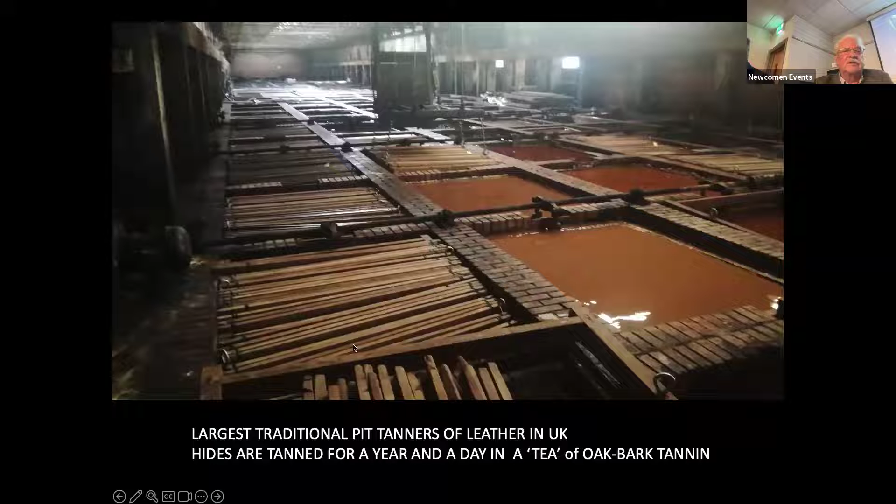This is a very well-established business, a very entrepreneurial managing director. It's the largest traditional pit tanners of leather in the UK, and it's still active within, I suppose, 1 mile of the commercial city centre, in an area that you'll see later is ripe for development. The hides are, as traditionally, always tanned for at least a year and a day, and they still use the oak bark tannin, as you can see there.

Quite wonderful. It ought to be a tourist attraction, but it's great. There's great difficulty in getting in for obvious reasons. My concern is that this one day will become firstly known about, and secondly, a lot of pressure to redevelop it. You might imagine that at the ingoing end of this system is raw cow and other animal hides, which is not exactly compatible with fine housing being built right next door now. So there are increasing pressures on this site. Nevertheless, it's survived so far.

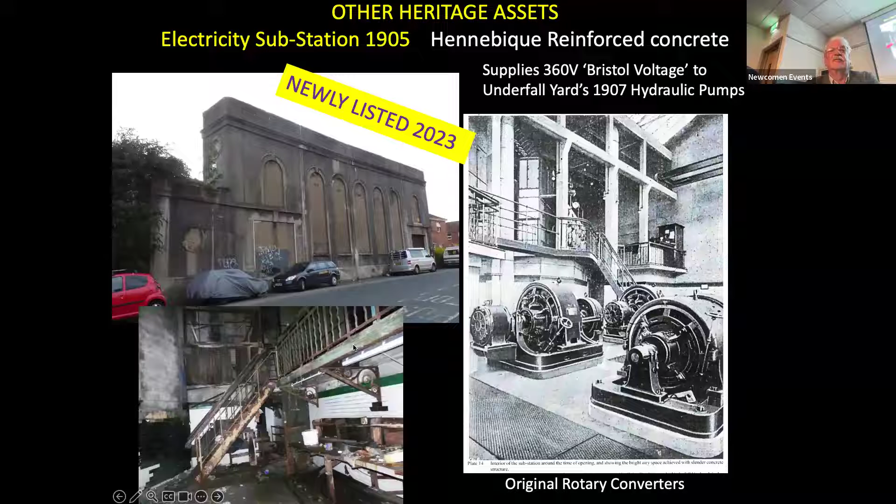We also have a rather fine electrical substation from 1905, constructed to Hennebique's design, reinforced concrete, one of the earliest - I think it is the earliest in Bristol, one of the earliest in the country. It was built to supply 360 volts, which is Bristol voltage, for the electrical systems in Underfall Yard that powered the hydraulic system. It still does that today, but from a transformer. It used to have rotary converters in it, as you can see there in that photograph.

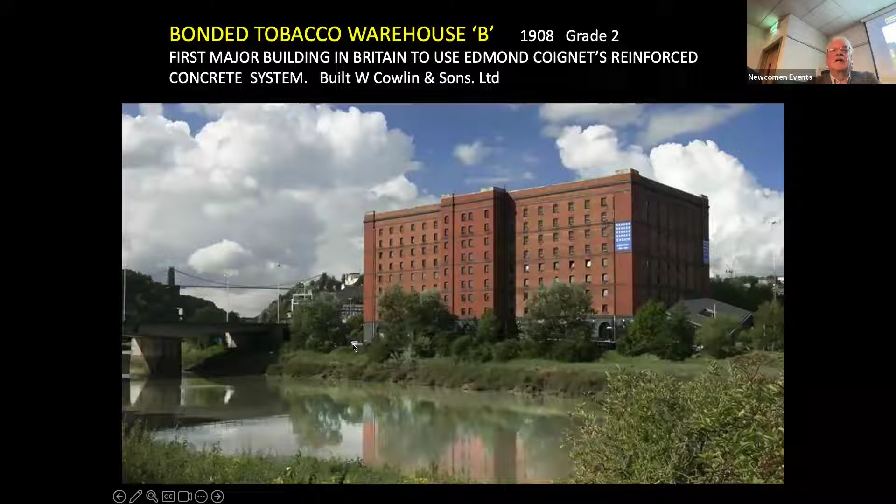We have probably more than our fair share of bonded tobacco warehouses. Of course, Bristol was famous for its Will's tobacco factory. This is Warehouse A, 1902, built by Cowlins. This is Warehouse B, 1908. These are all Edmond Coignet's reinforced concrete system, all grade 2 listed, and this one is tobacco bonded warehouse C, which is a storage area now.

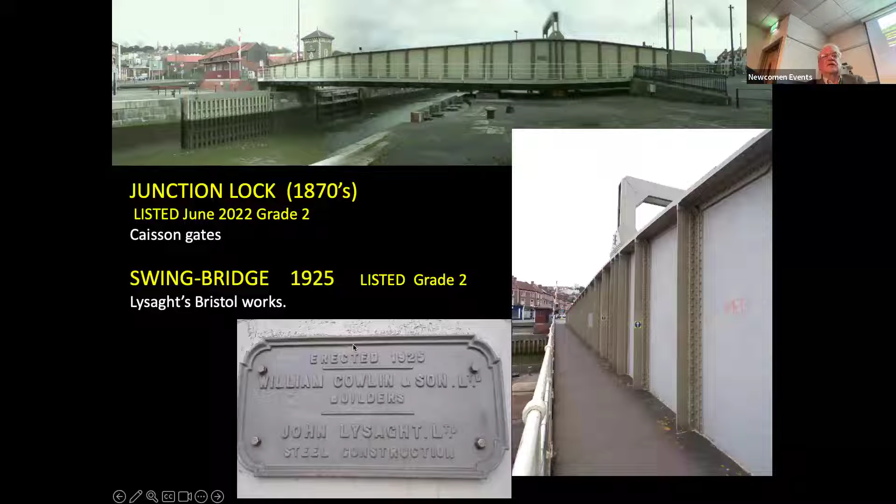The junction lock is actually now listed. It wasn't for some time. And the swivel bridge over it is locally made, 1925, made by Lysaght's Bristol Steelworks, and still rotating. It's a fine bridge.

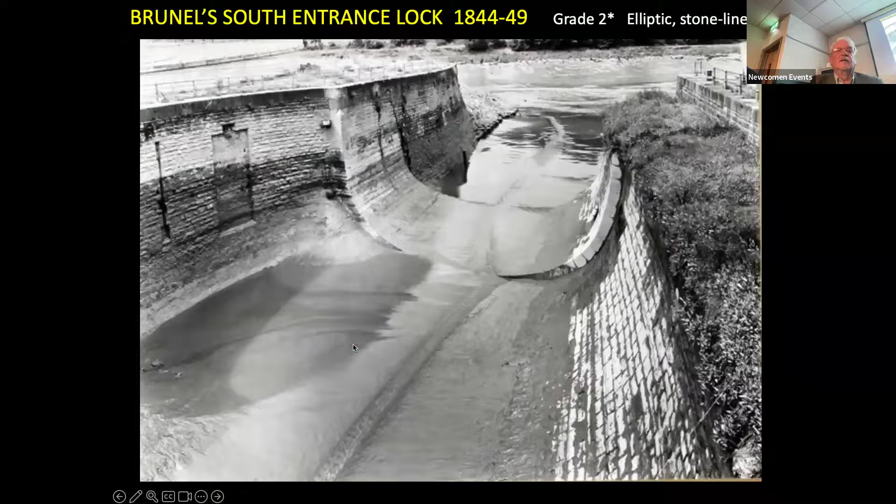Brunel's south entrance lock, that was the one I showed you in that first photograph on the right. That's what it looks like from upstream, or rather it did look like that until about 12 years ago. It was designed to have caisson gates, and you can see on the left there's a big recess in the wall where the huge hinged caisson gates used to go back into the wall so that ships going through the lock would not catch it.

I'm pointing to a little hinge on the wall there. That little hinge is 9 inches in diameter. It's a peg hinge, and there's another one further down. Wonderful, just a great big door, really, partially submerged. It's a floating caisson and closed against this rebate here.

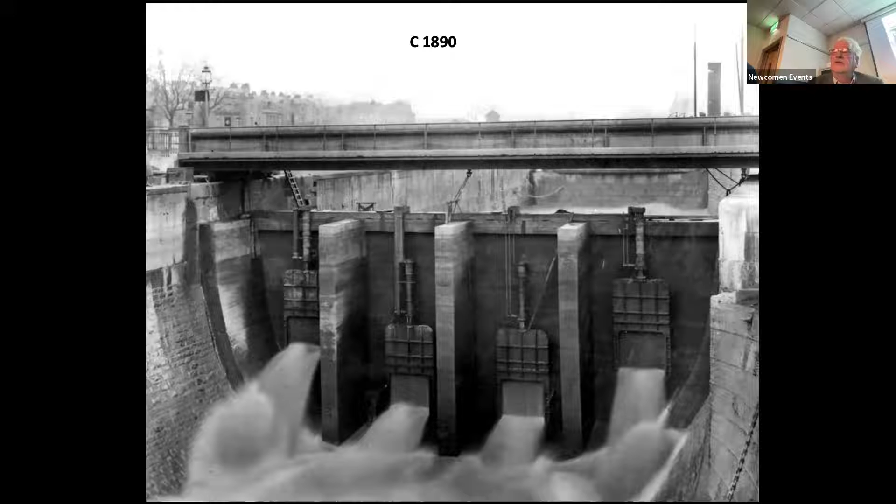Now, when they closed it off, you remember that first photograph I showed you? It showed a barrier midway along the lock, and this is the barrier as it was built. You can see that it has 4 hydraulically operated sluice gates. This is water hydraulic operated, pipes coming down from Underfall Yard. The hydraulic system actually is still working at Underfall Yard, although not delivering power to anywhere.

And of course, you needed so much water flushing through the floating harbour, because if you recall, this is the impounded River Avon, and the silt is still coming down that route. It's got to either settle out in the docks and cause no end of trouble, which it did, or it's got to be allowed to go on through and downstream, down the River Avon to the estuary. And so this was what was designed, to allow a jolly good flow from the Cumberland Basin through the closed off Brunel Lock and on then down the River Avon to the River Severn.

The hydraulic system in Bristol closed in the mid last century, about 1955 or 60, I think. And so these hydraulic rams would never be working, and they were modernized, or rather one of them was modernized. The one on the left that you see there was turned into an electro-hydraulic system to allow the water still to flood through, to just keep the water in the Cumberland Basin sweet and clear of silt.

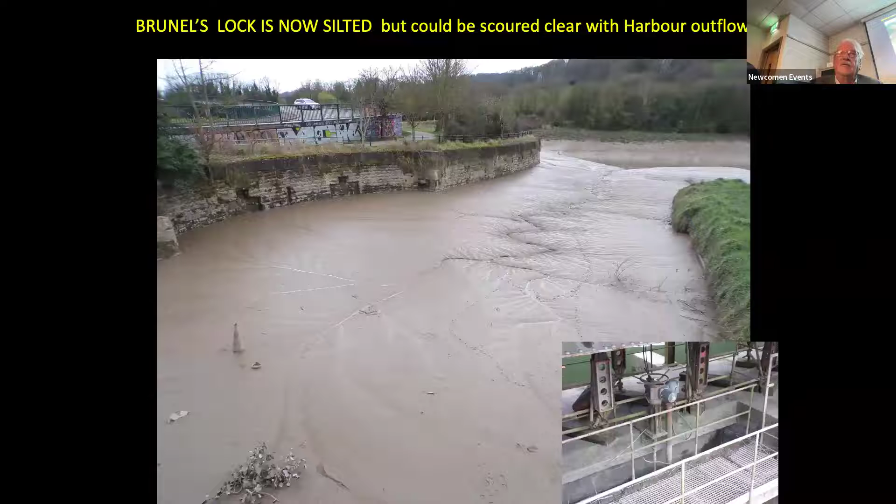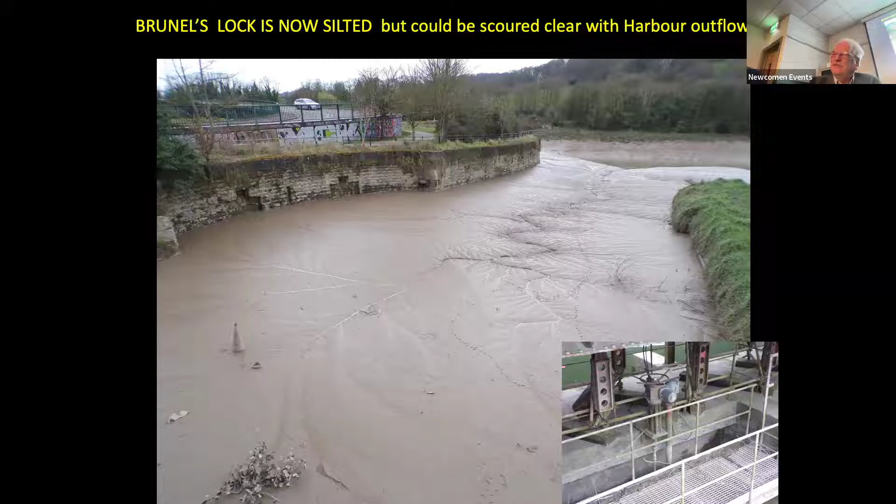Unfortunately, about 10 years ago, the electrics failed. It was going to cost £20,000 to put it right, which a city of our size couldn't afford. And so there we are, that's what it looks like now. There's about 25 feet of silt in it. You look at the bottom right there, you'll see the mechanism. It was a relatively straightforward electro-hydraulic ram for lifting the sluice gate. A great shame, because now we can't see that fantastic masonry work. Nevertheless, I'm hopeful that we might be able to find enough money to get that sluice gate working again, and the dividend would be fantastic to be able to see this rather wonderful masonry work going back to the 1840s.

Over that lock is a replica bridge. That's from 1873, from Howard's time, a copy of Brunel's bridge, which we'll talk about in a minute. That was a swivel bridge, but it's now stationary and unfortunately has been truncated at its tail end.

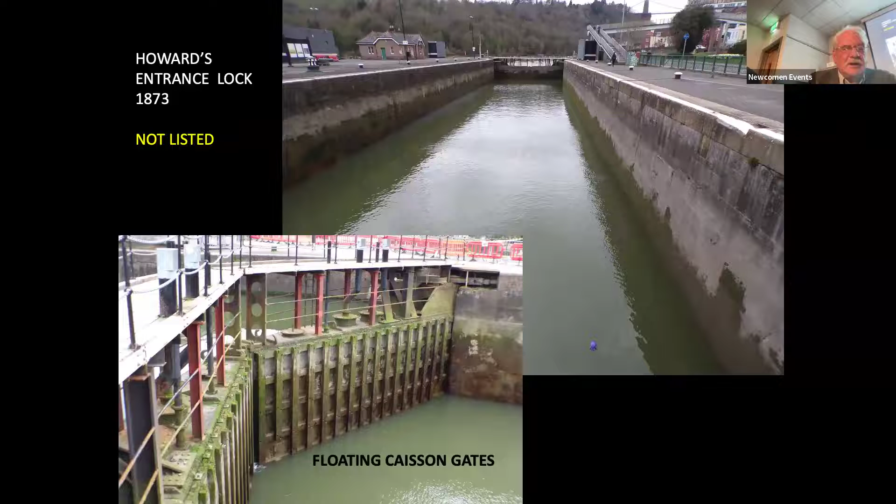That is Howard's Lock from 1873, still very much in use, in good condition and unlisted. For reasons that I've not been able to establish, the operational equipment in Bristol City Docks is not listed. And I think that's because the council don't want to be in a position of having to give themselves listed building consent to carry out work to their own property. But that might be a slightly cynical attitude. Nevertheless, again, floating caisson gates, as you can see bottom left there, still very much in use and very fine.

We also have the dock office at the entrance, and to the right, listing slightly, the toll booth, and the little green lean-to has in it the remnants of a tide gauge. It's all still there, and the whole lot is unlisted. And even though there was a review of the listing last year, none of it was declared to be of sufficient interest, architecturally or historically. Of course, there are other structures of the 1870s that look like that, apparently. A shame of that, I think. They are unique to Bristol. They might not be unique to the country, but we have only one set.

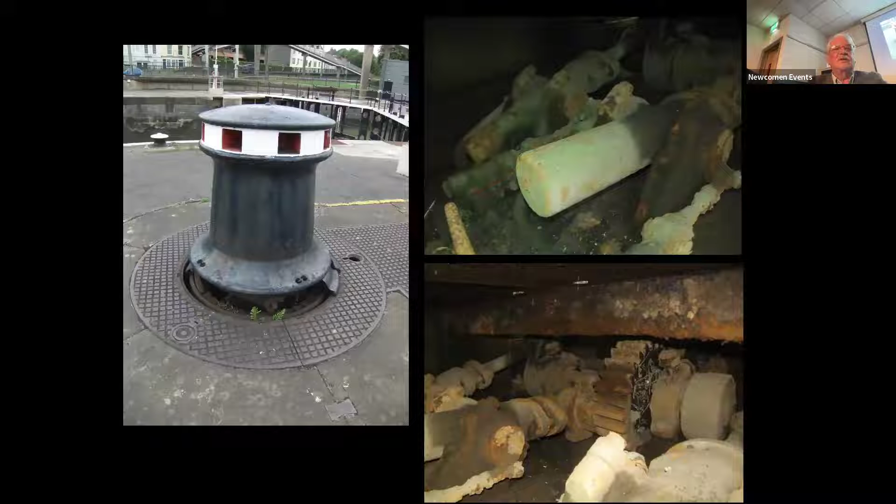We've got all sorts of rather wonderful dock furniture. We have electric capstans, we have hydraulic capstans. Of course, no hydraulic system now. But if you look underneath that hydraulic capstan that you see on the left there, you will see on the right a 3-throw water hydraulic motor. Wonderful, we have several sets. We also have Stothert & Pitt electric capstans.

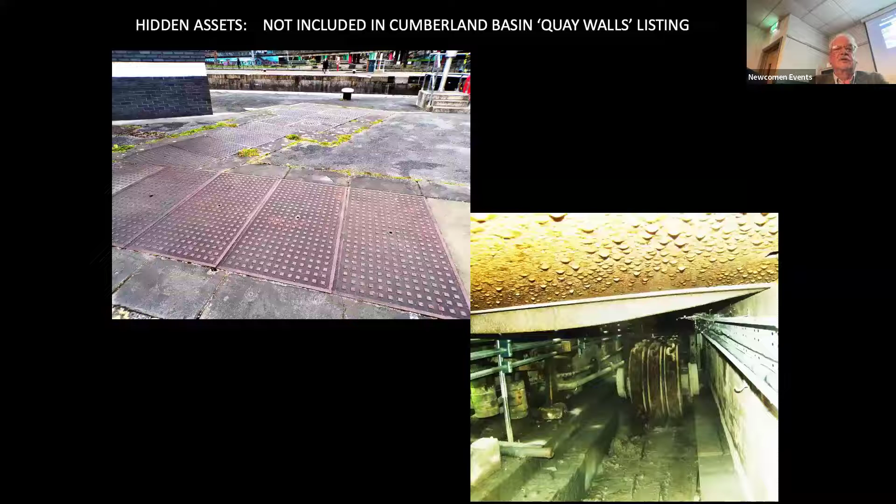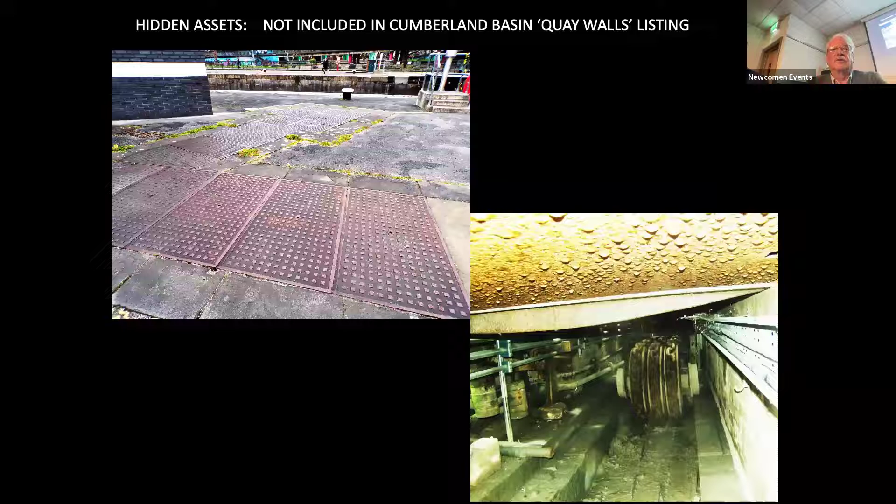There's a lot of these iron covers all over the tongue, the entrance area, and underneath are pits containing wonderful hydraulic equipment. These are hydraulic jiggers, rams with multiple falls of chains to increase the length of chain pulled. They were used both for lifting the paddles to allow water through and to open and close the lock gates. Every lock gate had one to pull it open and one to pull it closed, and there were two gates per end of the lock, so quite a lot of these survive. We don't know exactly how many, because the harbour master is rather coy about letting us lift his covers to see what's underneath. We have ways of peering through small holes to find out.

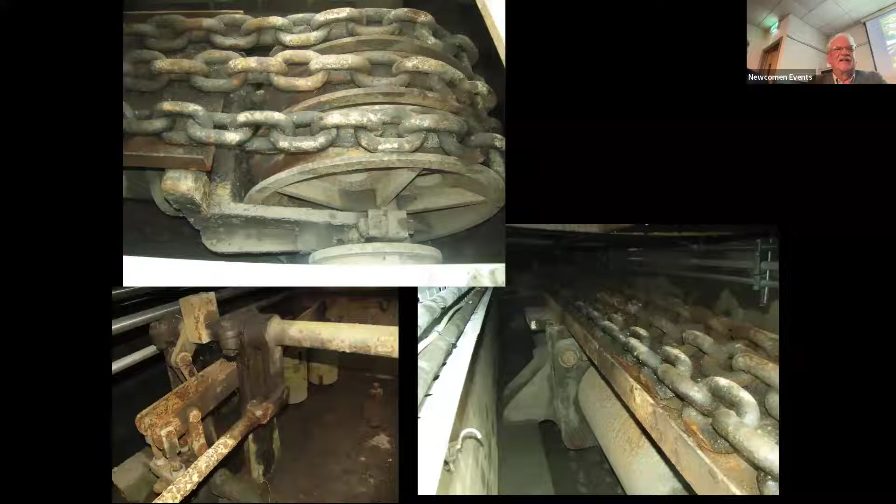Some of it's in remarkably good condition, given these are pits underground subject to seawater flooding. The whole of this area floods up to quay level. It's quite serious, and it's getting worse, of course. More of that later if you're interested.

In fact it was nearly cut up, but the harbour master at the time thought he'd better do some research first, to find out at least what the material was made of - well, it might have been by Brunel. After quite a lot of research, it turned out there were three bridges like this in Bristol, which made it very confusing trying to find the exact history of this one. It was verified and authenticated by David Greenfield, the structural engineer, as being Brunel's bridge - and a very fine one it is.

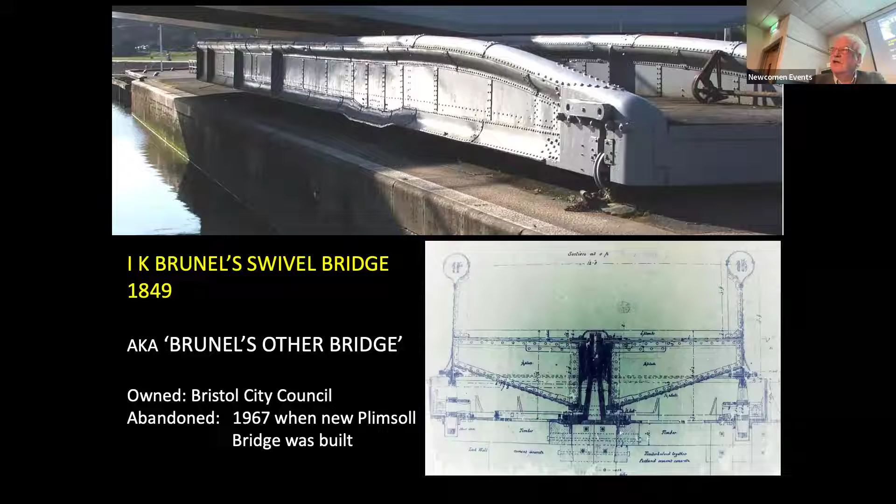So it's in rather poor condition now after 50 years. What we're looking at there is the central box section - there's a series of boxes, an octagonal box and a cross, if you like, in the center, and that's carrying 75 tons. Underneath it is a series of wheels, just four wheels and a turntable ring, and you can see it's really in rather poor condition. There's a danger it could eventually collapse.

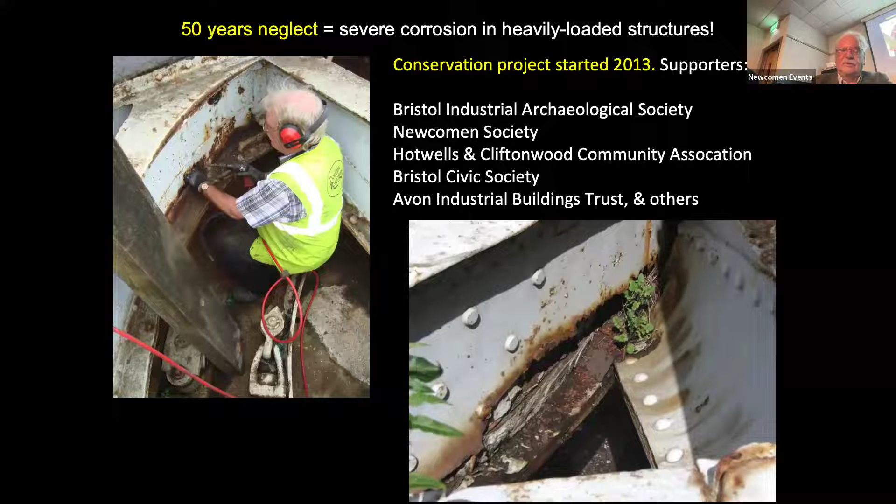So we've taken steps to try and preserve it. We started off by doing a lot of archival research, and we've done investigations on site - as you can see, we've peered into every corner. We've drilled holes to find out what the foundations are like, and discovered this was actually built on top of Jessop's old lock.

If you remember, this was moved to this site around 1872, when the new lock, Howard's Lock, was being built. Well, if you were excavating a lock, what would you do with the silt, the spoil? You'd simply tip it into any other lock nearby, and that's what happened. So this whole 75-ton construction sits on sort of compressed alluvium, which is surprisingly stable.

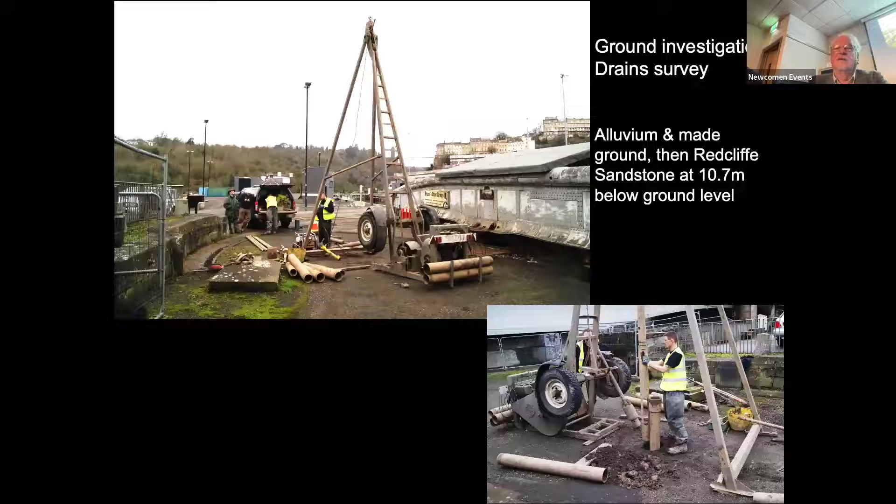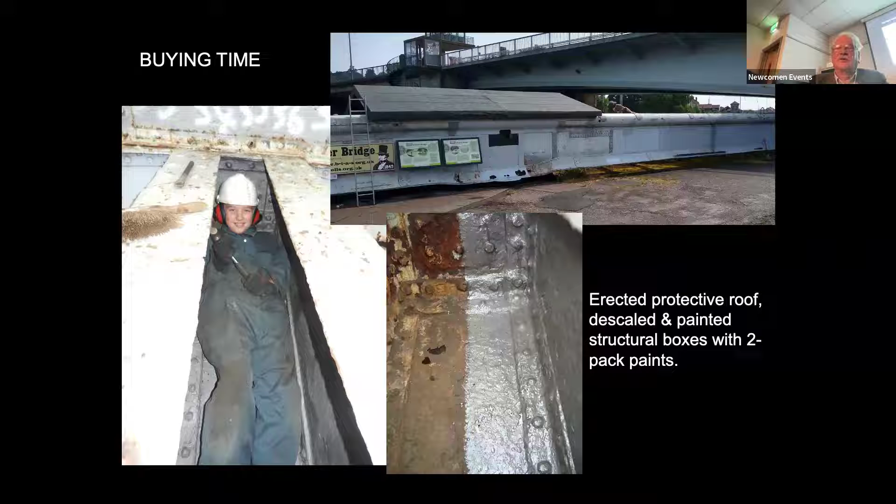Fortunately, we have a small volunteer who could get into the 9-inch wide box spaces. Need a small volunteer - unfortunately he's grown up now. In fact, there he is. He's now at Plymouth University. He's been with us for 10 years.

But we have now got the bridge turning again. We've done a lot of work to the turntable, including replacing some of the bearings, which you see top right. Notice these bearings - they're bronze shells, but to Brunel's rather extraordinary design, they're double conical, and we have no idea why. It's a real pain - everyone else would make them cylindrical, but this increases the complexity vastly. But nevertheless, it works.

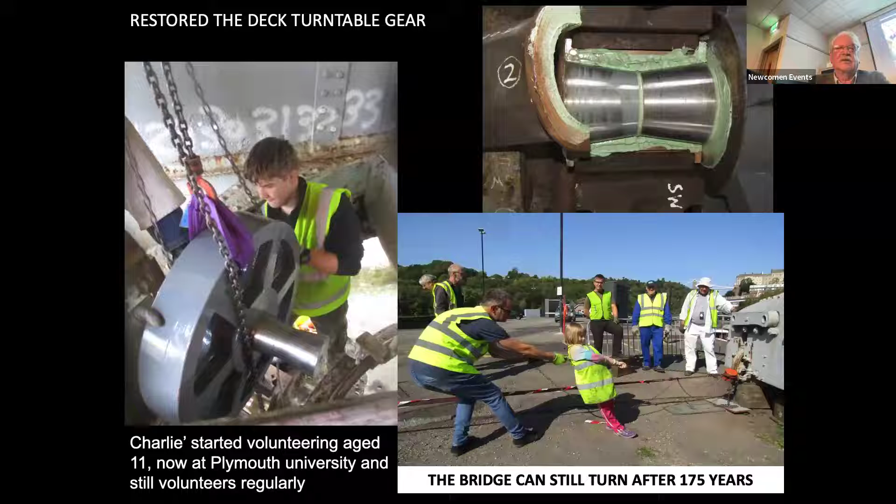We've been trying to raise the profile of this whole project. We've got 400 supporters now on our database. We have monthly work days for volunteers, and numbers seem to maintain very well. And by the way, next Saturday there's a volunteers work day, so do please bring your overalls along.

We had a 170th anniversary celebration in 2019, which was very well attended by the public, and we had, I think, 6 interviews from the local media and so forth. We had a 2-day celebration, the second day being a conference organised by the Institution of Structural Engineers.

And of course, we are open for doors open days. We've published some of our research and other information in 3 papers in the Newcomen Society journal. It's all been recorded by video, and of course social media is a great part of our life as well.

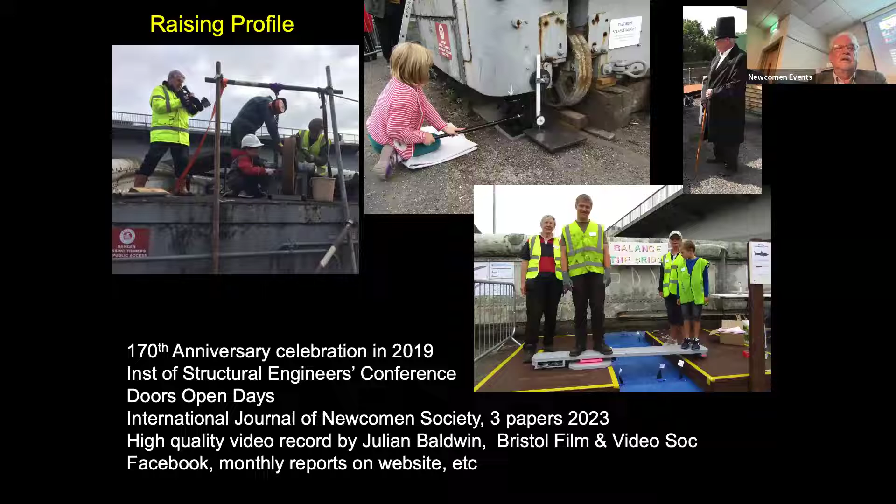So much about the heritage assets then. Let's just move on to the sort of politics and what's going to happen, what has been happening recently, and what is likely to happen in the future.

Now we're looking at a plan of the conservation, or rather the character areas, in Bristol City docks. All of that area you see there, except the red one to the left on the west, has been developed or is being developed. There are well-developed plans, and much of it has already been delivered. So all that's left is that difficult bit on the left-hand end there, where there's a lot of roads and rivers, or waterways rather, which is difficult from everybody's point of view, certainly from the planning point of view.

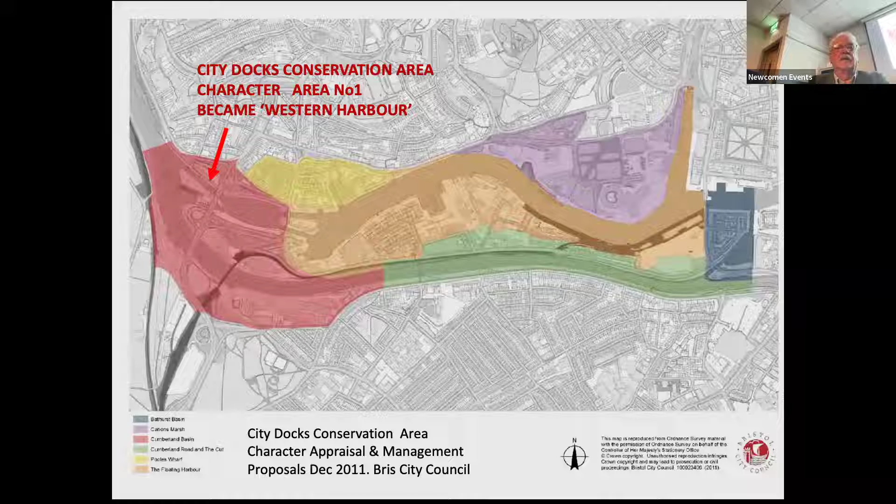And it was that area, the red one, that has now been called the Western Harbour. In May 2016, our newly elected mayor, Marvin Rees, declared his intention to create a city of hope built on ambition, inclusion, and social justice. Excellent ideas, and he focused very much on that western end of the harbour.

Actually, he was the first mayor of a European city who was black. He's been a very capable person, in my view, of high level of integrity, and has tried very hard to deliver what he said there.

In 2019, he proposed a scheme for that Western Harbour area that would include 2,500 new homes with offices, student accommodation, retail, and leisure. Now, you might recall that it's already full of waterways and roads, so that was quite an ambition.

He apparently sought funding from the Far East and had some success in that. It went public, and there was frankly quite a lot of outcry from the public in Bristol, certainly local people - why were we not consulted, and what's happening here, and what about the flooding, and what about our road schemes and all the rest of it?

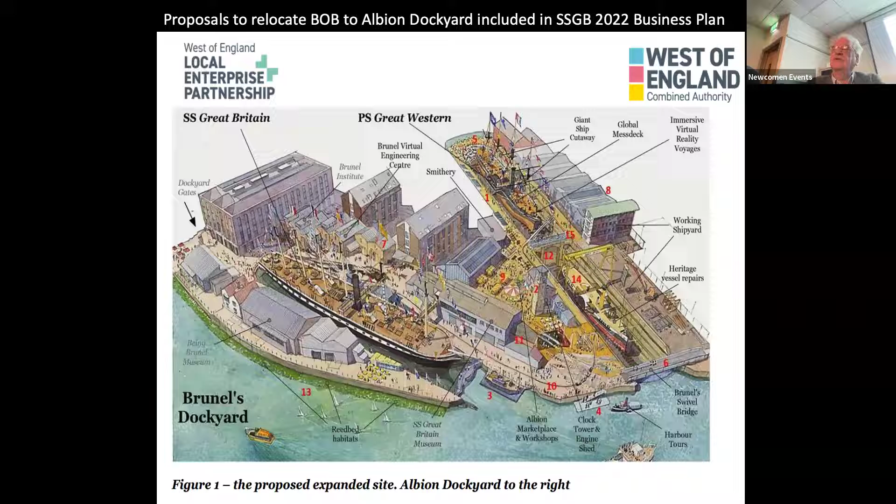So the plan was to move this rather derelict, heavy and flexible bridge to Albion Dockyard and display it there. That had some advantages - it would happen fairly quickly, and the SS Great Britain are rather good at capturing money and making things happen, so they would look after it and do a good job of conservation and maintenance. The downside is that it would be extremely expensive, out of context, and quite a risky thing to do.

So I'm just going to run through what happened last year. In the spring, Historic England relisted everything, all the historic items in the Western Harbour development. That's partly because they could see a development coming, and partly because they could see this bridge might be moving elsewhere. So they gave the Brunel Lock, the Swivel Bridge, and the Plimsoll bridge over it what they call group listing - in other words, it has group significance, meaning please don't take one item out and put it in the Albion Dockyard.

In the summer of last year, that plan I showed you went public, and they declared their intention to put it in for listed building consent. In response, one of our volunteers started a petition on Bristol City's own website to ask the City Council not to allow it to be moved, but to preserve it in situ. That became very popular and in fact became the largest live petition last year.

Then suddenly, on the 1st of September, the CEO of the Great Britain Trust announced his retirement with almost immediate effect. Historic England wrote a letter to the SS Great Britain giving a lot of clearly worded reasons for not moving the bridge, and that resulted in November with the Great Britain announcing they weren't going to move the bridge. Subsequently, they put in their planning application for Albion Dockyard without it. This may not be connected, but I heard then that there's a new chair being appointed at the SS Great Britain at the end of this year.

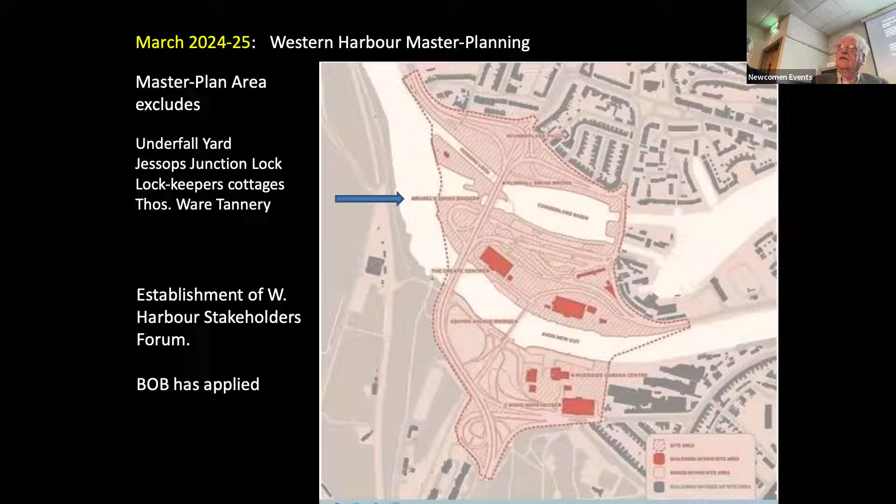So what's happening now? Well, the whole of that area is subject to master planning, as they call it. And the liaison, the consultation with the stakeholders, the people like our group, and the residents, is going to be via a stakeholders forum. That is being set up right now, and we're hopeful of being invited to join it. We have applied.

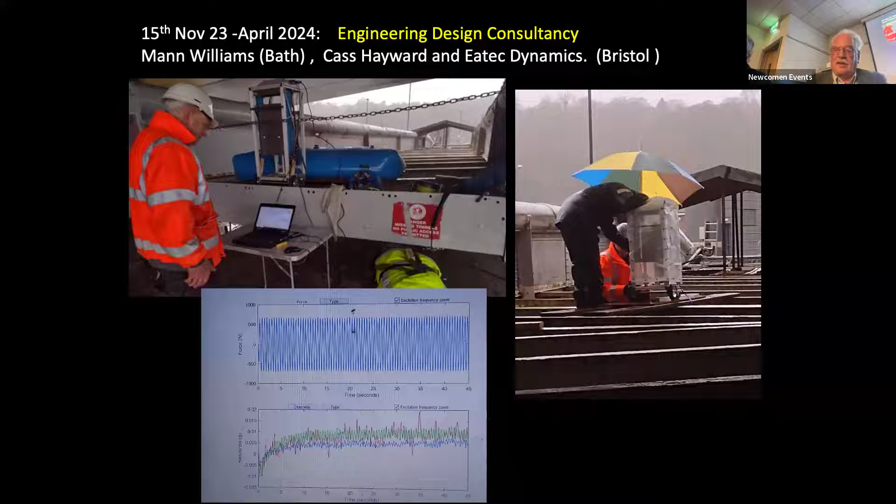We have also now just started an engineering consultancy paid for by Historic England. This is a rather innovative scheme using modern technology. They're using a technique where they shake the whole bridge, and a lot of transducers measure the acceleration of different points, so they can work out the flexibility of the bridge and what needs to be done to repair patches. But I'll show you a video of that just now.

So just very briefly to finish off with, what we're doing now is trying to get agreement on what the policy is for the treatment of all the heritage assets in the Western Harbour area, not just the bridge. It's to be supportive of the Western Harbour master planning process. We're not trying to fight them in any way. We are on their side, provided they do the right things in terms of conservation.

That might sound a little bit high-handed, but we have a clear view of what we want to do, and we think that policy is right and it's justified and in line with Historic England heritage policy and all that. It's our task to work with the council to convince them that that's what they should be doing.

What we're trying to do is get them to firstly stabilize the condition of the assets, restore them to a condition in which they can best serve the Western Harbour development. What about perhaps getting the swivel bridge working again so it can act as a bridge, a low-level crossing, which is very necessary, and then provide provision for long-term care and maintenance.

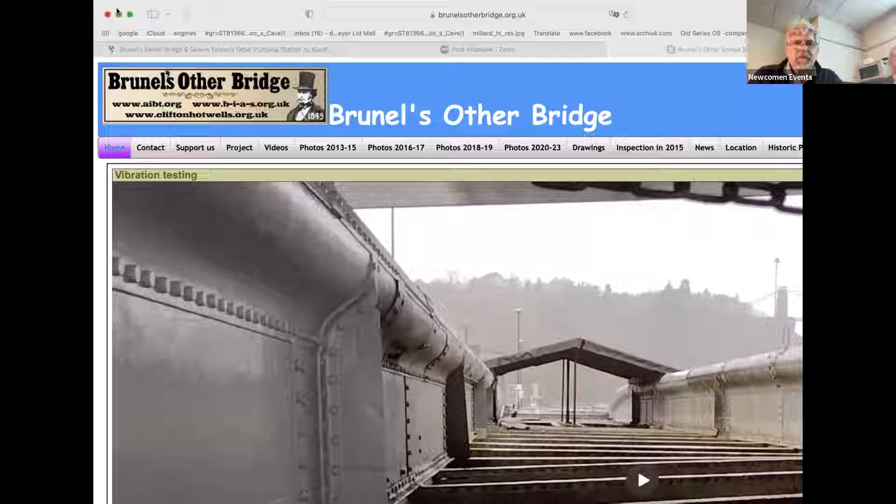Let me just explain a little bit about it. The bridge has got about 50 fairly serious rust holes in it, and maybe a couple of hundred rather more minor defects, regarded as non-structural, that is wasting of plates and loose rivets and things like that. The challenge is to work out which is which. So it's important to model the bridge with a mathematical model, which is relatively easy to do, and you can mark on all the different defects, actually put on all the rust holes and so forth. Then you can use mathematics to see what the strength is of each part and how much work you need to do to repair everything, to make it structurally sound and up to a certain standard.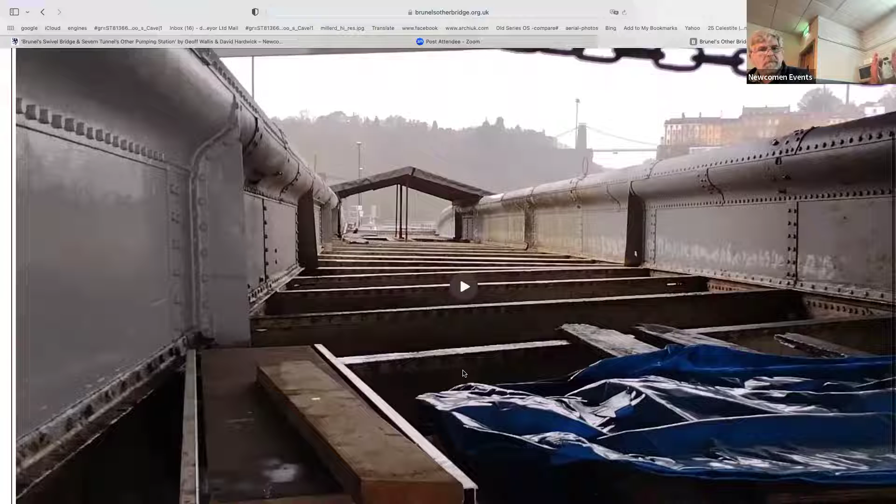The problem is verifying that model, and that's what this does. It enables the structure to be vibrated, and they can tie back to see whether the match is good. Apparently it is fairly good so far. So this is the video there, David.

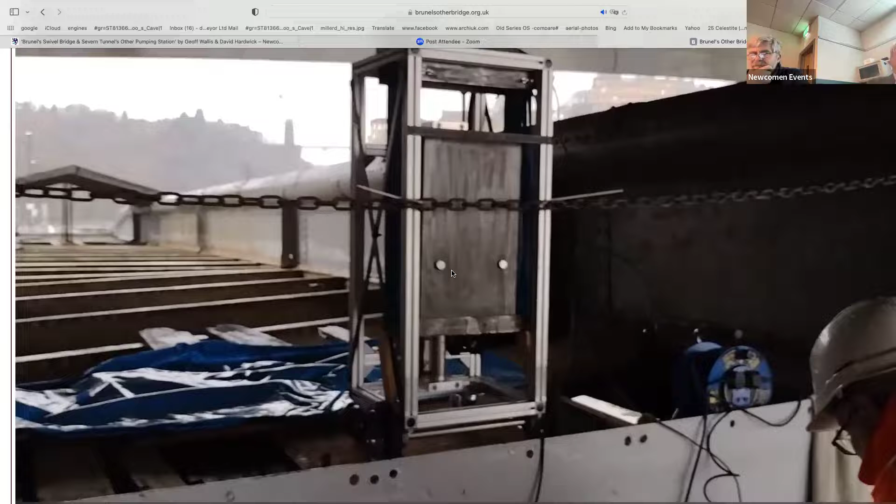Yep, okay, you can see there's a vibrator there. That's about 70 kilograms, vibrating at a speed away from the natural frequency of the bridge. Elsewhere, all over the structure are little accelerometers glued on, literally glued on or held on with little magnets, which are connected back to a laptop, and we'll see that in a minute, hopefully.

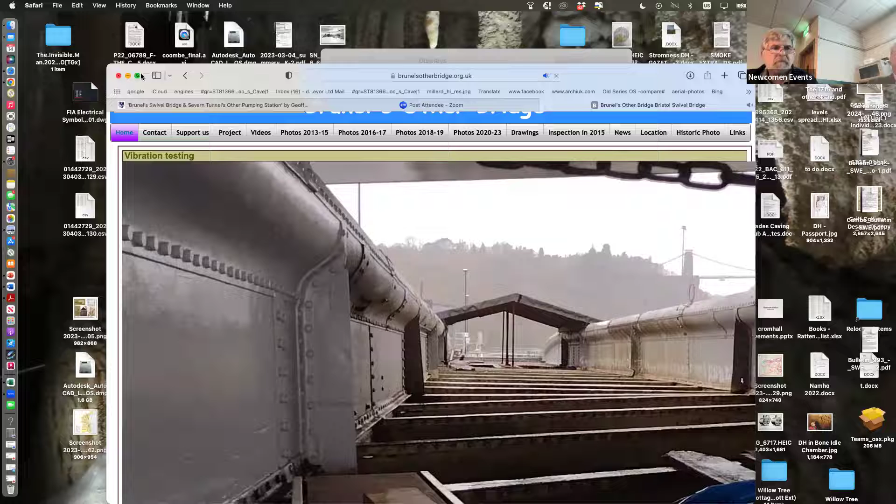If you can measure acceleration, you can easily work out the velocity, and from that the displacement. So each of these points can be verified. The displacement under a known agitating load can be measured, and that measurement compared with the predictions by the mathematical model. So there's some confidence that the theory and practice do tie up.

Not working? Doesn't appear to be. The blue container you see there is a water ballast. So they first did this with the bridge as found.

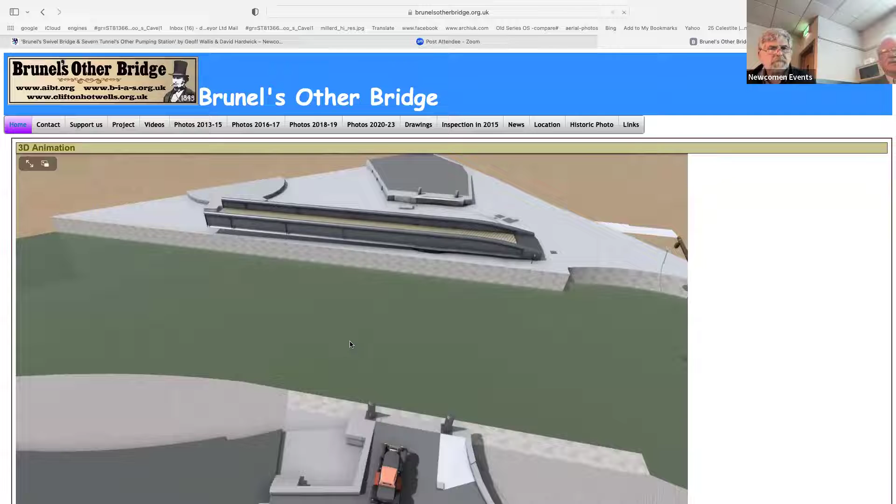Let's go on to the other one then. Just hold that, don't run it for them. And then they put some water ballast on it. Then they propped up the jib end of the bridge and did the vibrations again, to get it into different modes to test the model again, which was done very quickly in one very wet day on site.

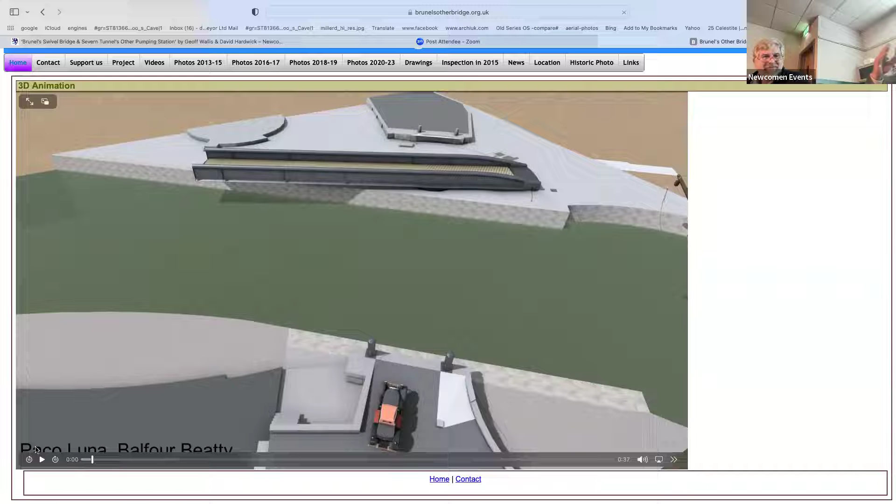The other one, I'm just going to show you now, hopefully a little bit more successfully. We had a visit from a volunteer, a young man who came to the site and asked what we were doing. After we explained it, he said, well, how can we help? I'm from Balfour Beatty and I work down at Hinkley Point C.

I said, you'll have some sophisticated kit then for surveying the bridge. Have you all heard of LiDAR? That's Light Detection and Ranging. It's a very clever camera arrangement that can work over 360 degrees to capture both visual images and LiDAR, to build a cloud scan, a cloud point record of the position of every part of the bridge.

Just an amazing system. He brought along his very expensive piece of equipment and a couple of helpers, scanned the entire bridge from different points all the way around, and went away and produced this model, which you'll find on the website. That's a very accurate model. This system works to within about 1 to 2 millimeters.

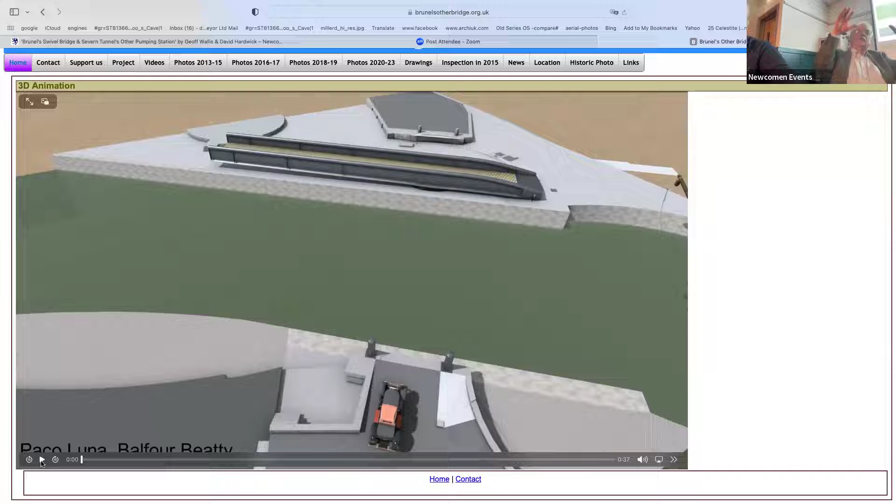Absolutely incredible. With this cloud of points, the computer software can go to any point, and you can say, I want to start there and have a look at the bridge from anywhere, or I'd like the bridge to turn. Now notice he scanned the bridge with the roof on it, but they've digitally taken the roof off and put the deck boards on.

You'd like to run this thing then? So he said, well, maybe we could just let us turn the bridge as well, see what it looks like, the bridge turning.

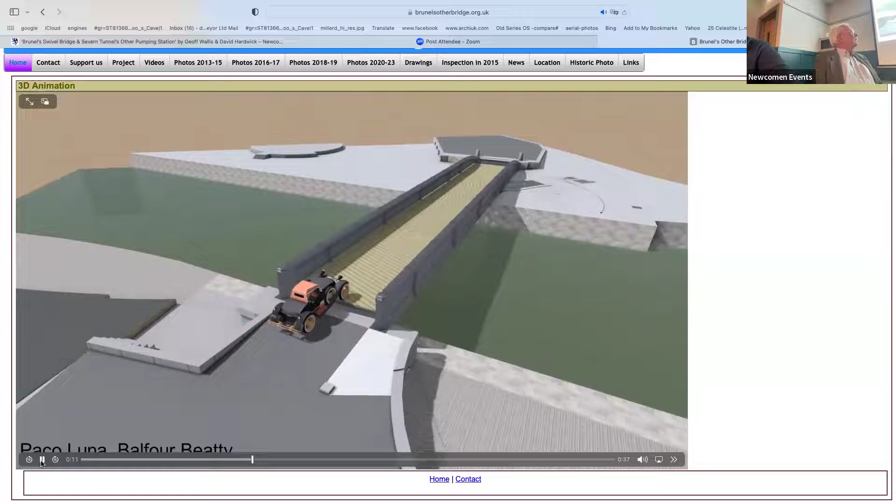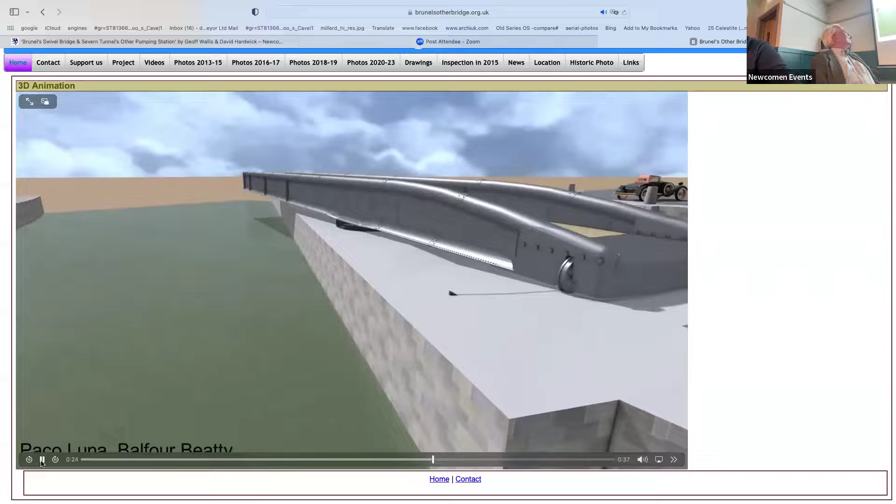Isn't that incredible? That's all from real data points and is to fantastic accuracy, and it was produced for us free. And we even get a free Matthew ship. I don't think the car and the ship were actually scanned, but the bridge itself is that accurate.

CGI. I'm sorry to have overrun, David. That's fine, no problem to you. Any quick questions when I change seats? Thanks, Geoff, well done.

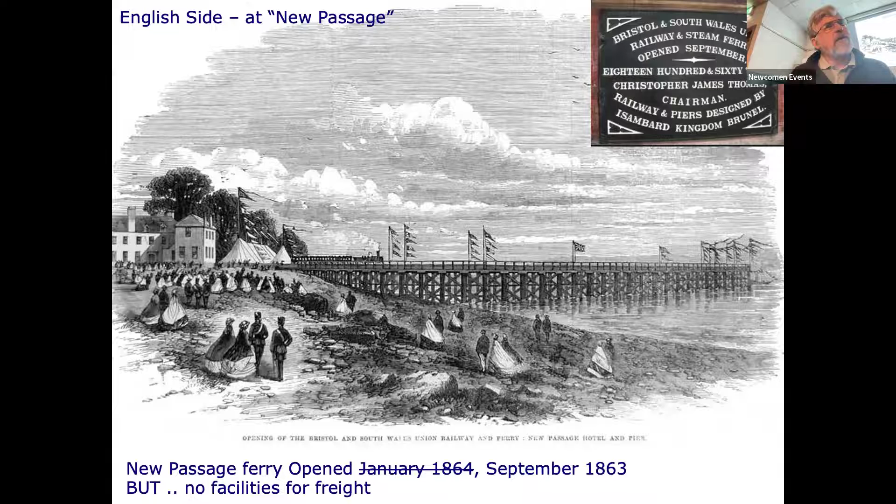But when it first opened, there were apparently no freight conditions - there was no provision for freight. It was a passenger thing at that time. Nice colour version of it for you as well.

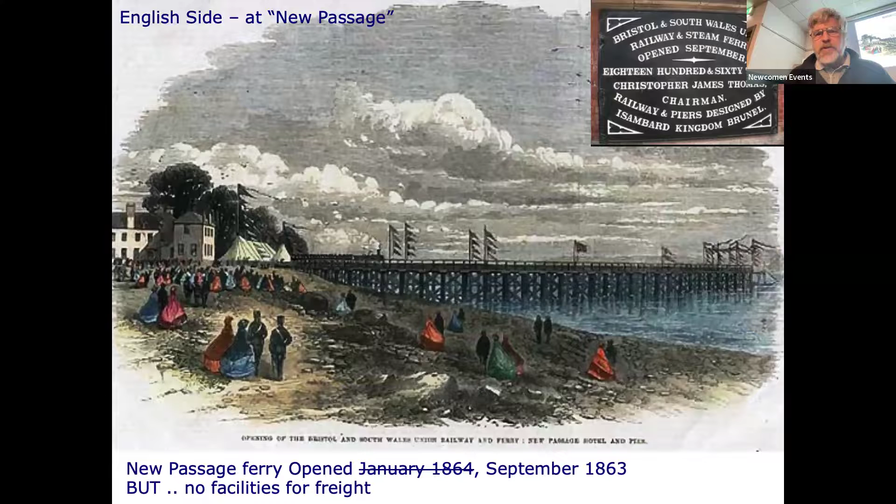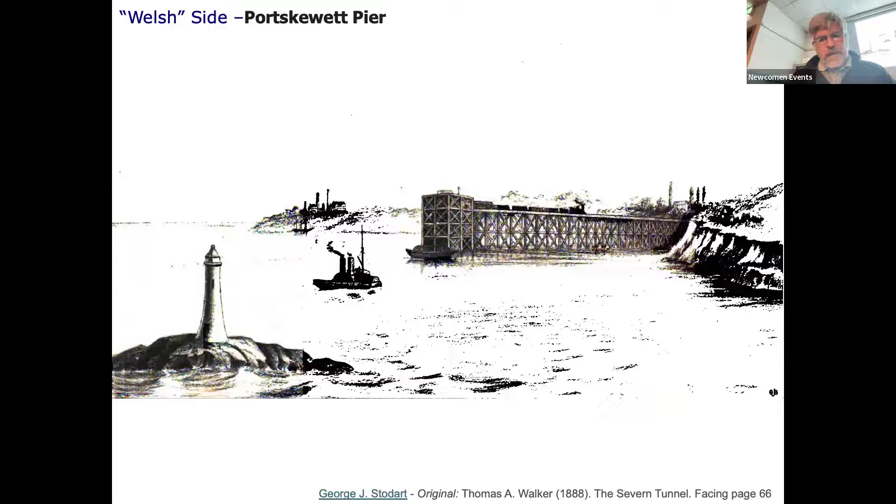On the opposite side, if you go across to the Portskewett side, the Welsh side, there you see they had a very similar pier on that side. I've not been over there to see if anything's left of that - somebody might be able to tell me. I'm not aware that there's anything left on that side at all. But again, you can see the actual train coming in there. So the boats would come in and then go on. And there's a colour version of that kicking around as well.

Just in terms of other things on the website, this one's a little bit out of order, my apologies for that. There are various photographs of bits and pieces of the equipment that is in there, including a film. British Transport Films did a film about the Severn Tunnel and included a lot about the pumping that was going on there. But we'll come back to that.

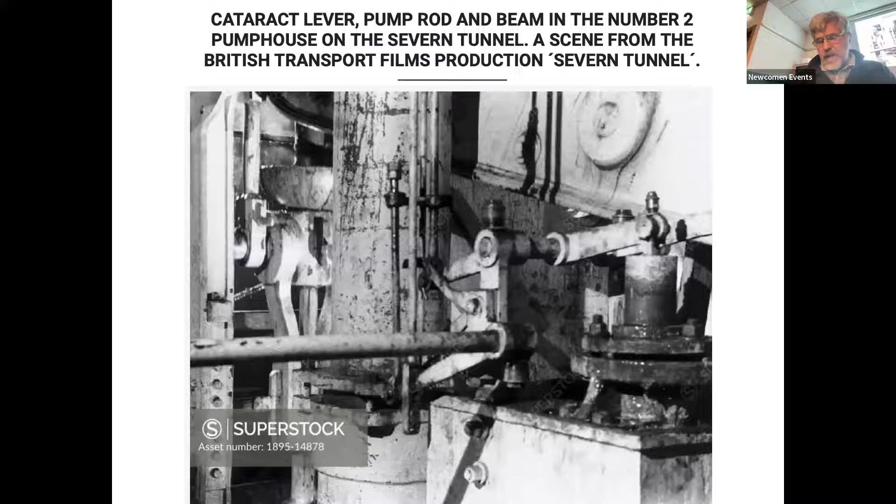A lot of the stuff I've given you about that railway link comes from this website, greatwestern.org. So if you're interested in knowing a bit more about the railway side of things initially, go and have a look on this site. And this goes into talk about the actual tunnel itself.

Now, I'm not going to go into too much about the tunnel itself - I will do a little bit of an overview in a moment. But one of the nice images on there is this one, borrowed or used from the Royal Commission on the Ancient and Historical Monuments of Wales - it's one of their images. Again, you Google it, you'll find that. And there's a series of nice black and white photos of the main pumping house on that side.

So let's talk about why it was necessary. Well, once they started doing the tunnel - the tunnel opened in 1886, I've got in my head, I think I've got it written down somewhere - it wasn't long after the 1860s, 1863, 1864, when they started this ferry thing, that they said, we need to get on with the tunnel. So the plans were going through. Brunel had died, so he didn't move into doing this. But is it Hawksworth who finished off?

Hawkshaw, that's the name. The man who finished off the Clifton Suspension Bridge, he was the engineer for this one. So again, they started doing this.

If I show you this slide, you can see at the top there's a map or a plan section. The blue, of course, is the water. And as with most railway tunnels under rivers, it goes down, down, down, down, down. So they're cutting initially into a tunnel, it goes all the way down, and starts coming up the other side. As you're digging this, there's a need to pump some of the water out as it's being dug, and of course there's going to be natural seepage coming in, and a pool in the bottom. So they knew they had to do some pumping anyway.

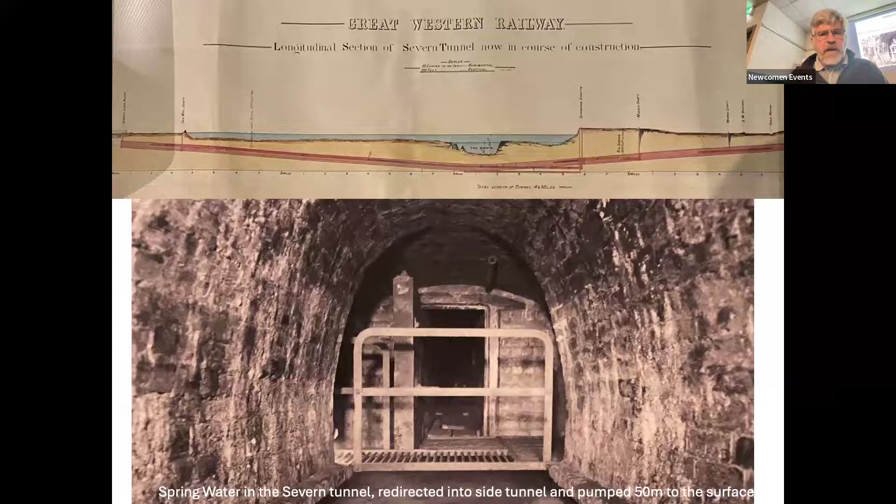The image at the bottom is a photograph of the current culvert that they've captured, what's called the Great Spring. There's a whole story here. I won't go into too much detail, but basically whilst they were digging this thing, they broke into what's called the Great Spring, or the Big Spring on this picture. If you look on the right hand side, you'll see it says Big Spring.

So they had pumping shafts. Sudbrook shafts were already there. They had various other shafts, the middle shaft, etc. They were pumping, and like most railway tunnels, you tend to have a shaft going down and you dig out in both directions, and they join together. You don't just start at one end and go all the way down. They would have had multiple shafts. Of course, you couldn't have multiple shafts in the middle bit because there's a river in the way.

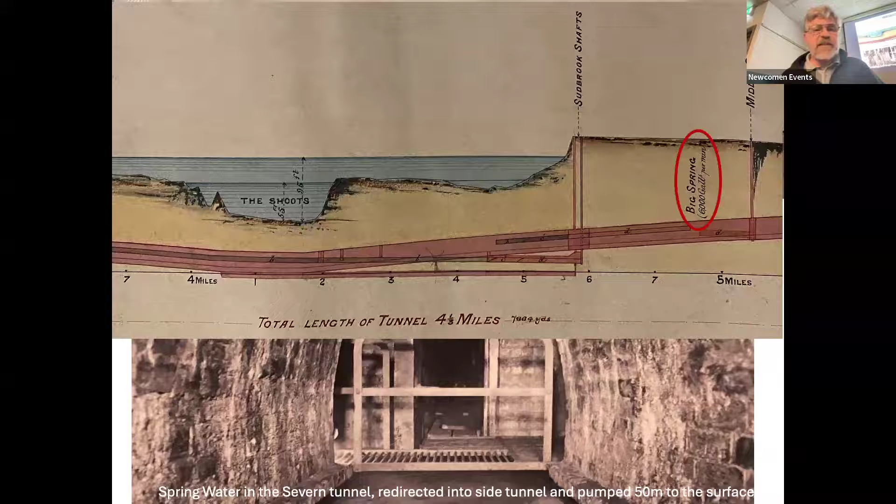But on the approaches, they had these shafts, and it was actually the bit that was going down from the middle shaft that broke into it. If you look on there, I'm not sure whether you can actually see that from sitting back there. So it does say 6,000 gallons. Check what it says myself. 6,000 gallons per minute. Yeah, not per hour, not per day, 6,000 gallons per minute. That's what they broke into.

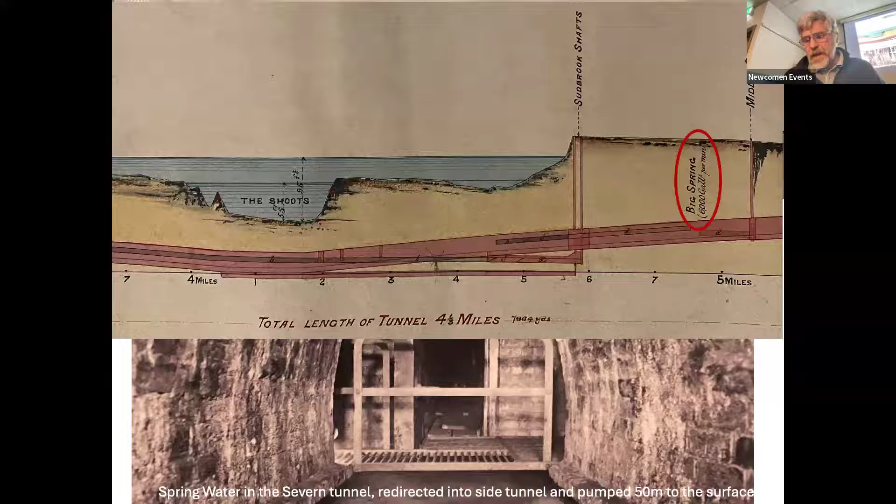There's a whole story about how they called in a diver, and the diver went down and closed one of the doors so they could lessen the water. Then the pumps were big enough to pump the water down enough so they could get and control it. But they quickly realized that this underground water source they'd broken into was a significant problem, so they were going to have to do some serious pumping to get it out. And so, as well as the pumping engines they'd already put in, a small one at Sudbrook, they decided to put in some massive great ones as well.

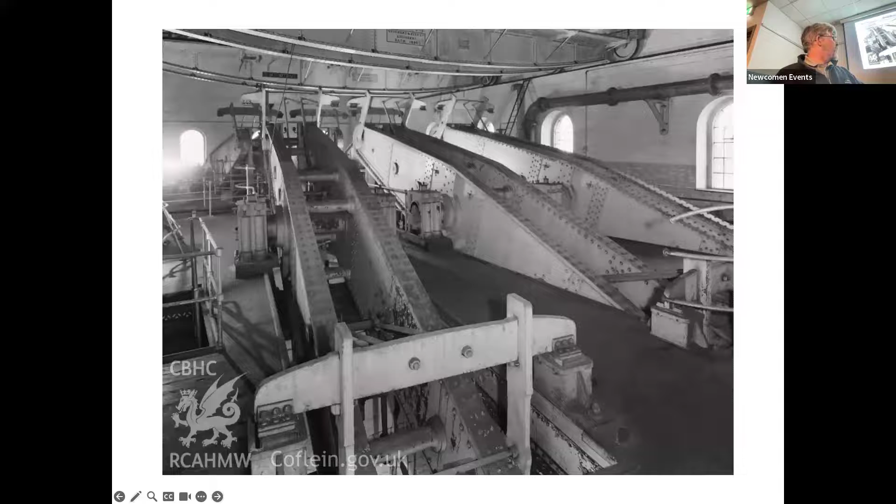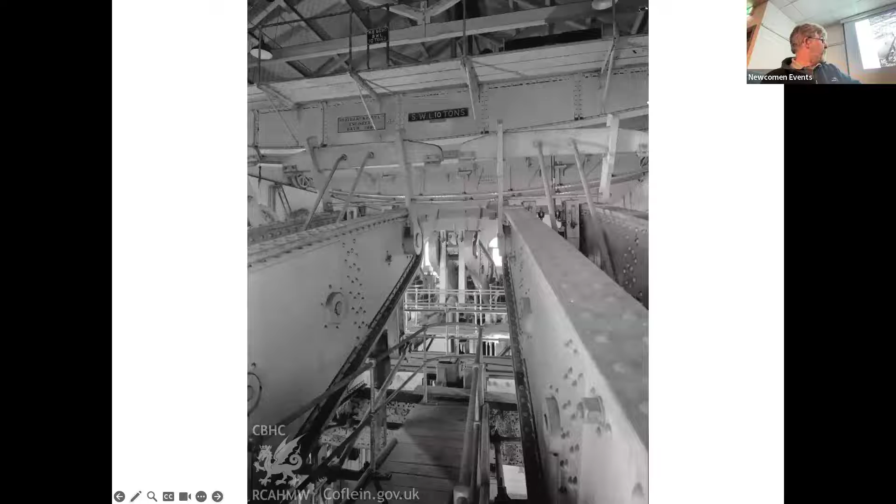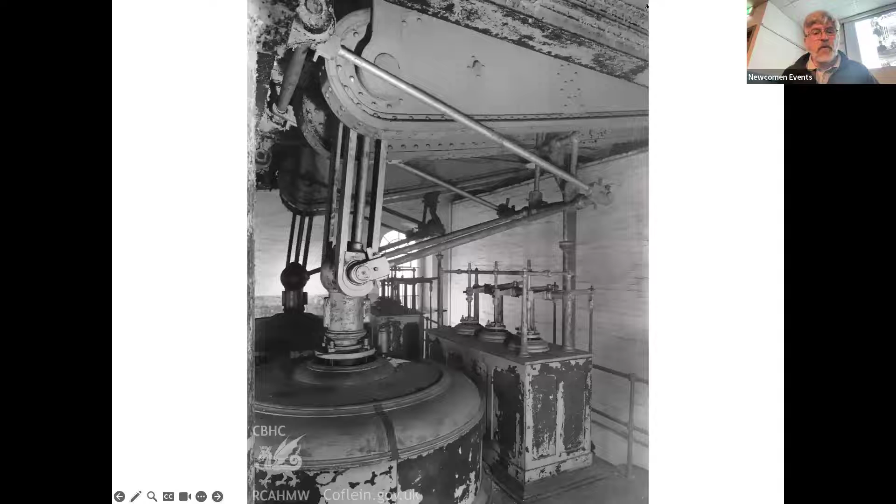But there are some images on the same site of the pumps that were in there before. There were 6 of them, and they were centered around the main shaft. I'll show you these briefly because you can, of course, go and download these and look at them yourself online if you want to. You can see this is obviously at the top level. Beams are, that's the end. Then they're all pointing towards the shaft in the middle, and then there's ones down at the piston end, the cylinder end, as well. Some nice parallel motion going on there. And there's quite a few of these, other ones as well as the ones on the Royal Commission site.

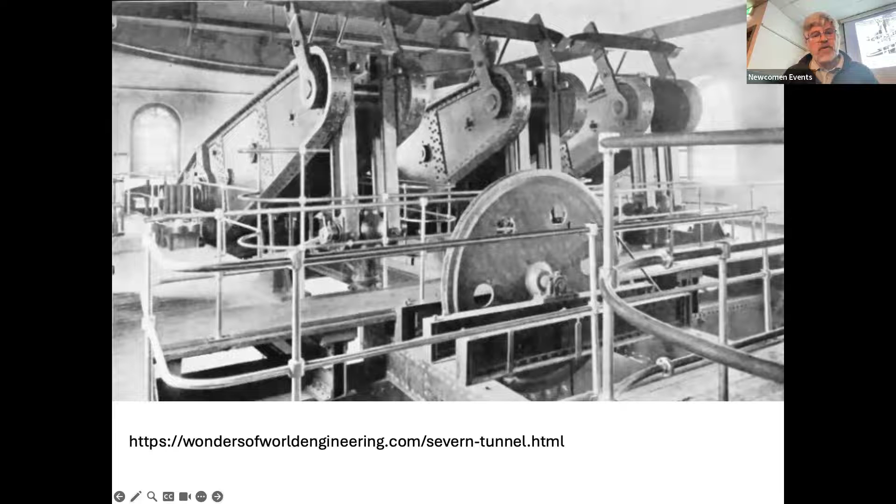Other people have gone out there and taken photos. Here's one from a site called Wonders of World Engineering, with some details about that. There's other things too, not just about the pumps, because being a tunnel, they needed very large ventilation fans. So there's quite a bit of stuff on there about Sudbrook, if you're interested, you can go and have a look.

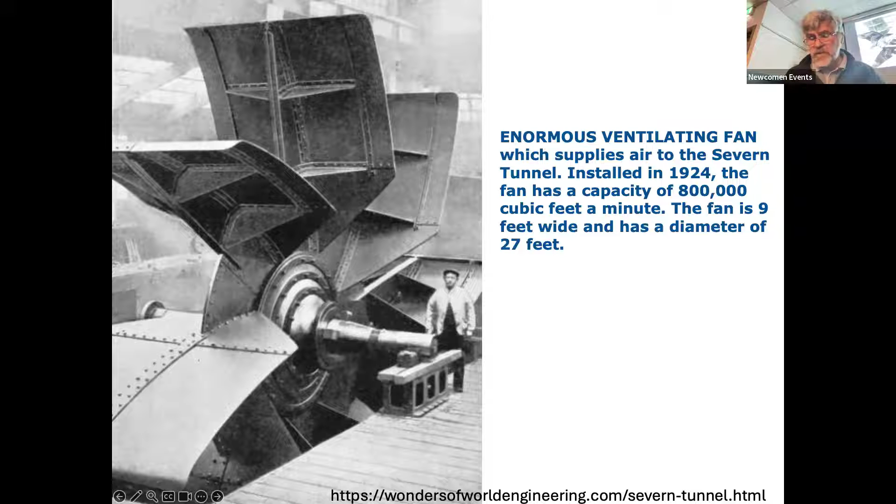One of the main sources you could find, if you Google it, is a report of a visit made in 1959 by the Newcomen Society, whose summer visit was to the Severn Tunnel pumping plant. It says on Wednesday, 23rd of March, 1960, by permission of somebody who knew the chief mechanical electrical engineer, they went and paid a visit to Sudbrook on the Monmouthshire entrance to the Severn Tunnel to see the Cornish beam engines and the Bull engine.

There was a Bull engine, which I think was in a separate building, that for many years kept the tunnels clear of water. It finishes by saying that by 1962 it would have been replaced by new pumps and electrically driven motors. There's a whole thing with lots of details about the sizes, the stroke, and all the things you'd expect in a Newcomen Society report of a trip to a pumping station. It's titled: visit to the Severn Tunnel pumping plant at Sudbrook, Monmouthshire.

What about the other side? Well, that same report also says: on the Gloucestershire side of the River Severn at Seawall, there is one pumping shaft, 15 foot in diameter by 100 foot deep, with two beam engines driving the pumps there, seen during the summer meeting in 1959. So although there's goodness knows how many pages of write-up about the Sudbrook side, that's all it says. The Newcomen Society went there in 1959, and they simply reported that they went there.

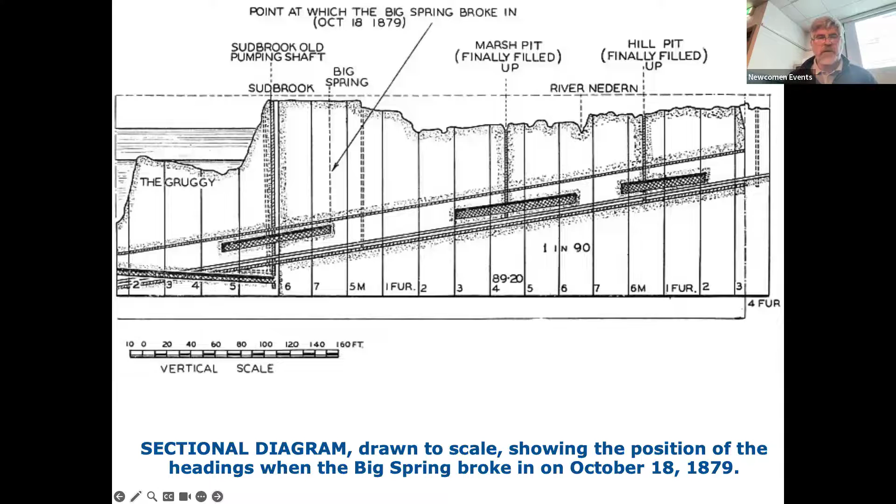So let's go back again. This was the diagram I showed you on the right-hand side of what they were doing. If I move you over onto the English side, you've got a thing called the Salmon Pool on the surface there, and a thing called Sea Walls. Basically, they did some flood prevention, they built a wall, that's why it's called Sea Walls, and they put a pumping shaft on this side.

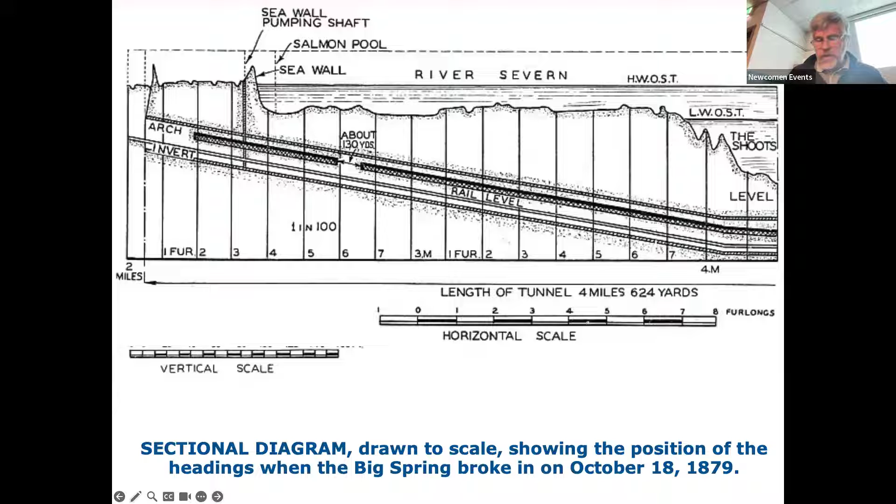Of course you needed a pumping shaft, because before the two tunnels had connected, the water was running into the tunnel on this side, so you needed to pump the water out anyway from this side. The intention would have been to have a pumping engine on both sides to keep the water drained. They put in the massive ones because of the Big Spring, which brought so much extra water. This was the condition again at the same time when they broke through. You'll see they were only about 130 yards away from joining this bit up at that time. Obviously there was still more work to do elsewhere, but they were getting quite close in 1879 to having this thing ready to go.

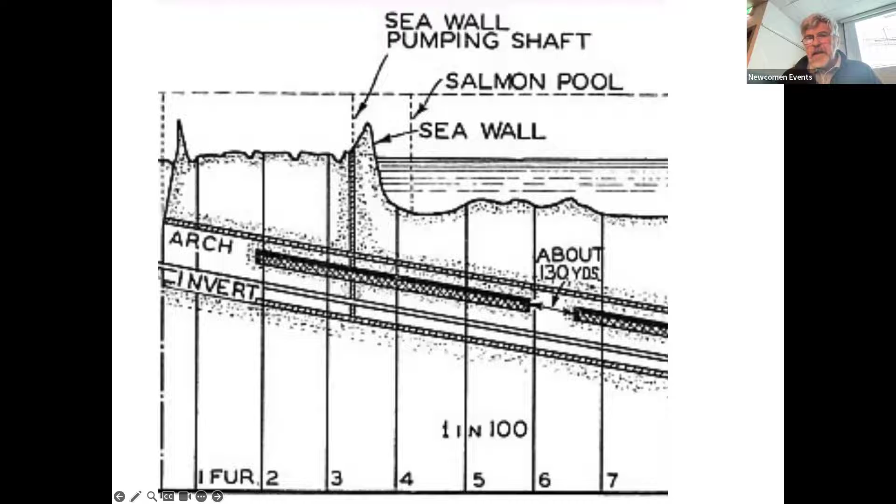And this is the Seawall pumping shaft end, on the English side. I came across a reference saying that at the eastern end too, water broke in through the roof of the heading, so it wasn't just flooding from the Great Spring—this was coming in from the roof.

Basically, there's a whole series of fault lines and splits. I've done some work on this—I published an article in the UBSS proceedings years ago about Otter Hole, a cave near Chepstow, and the water that goes into that. I've also more recently done another piece about the geology of the North Bristol area, about where the water goes and everything else. The whole area is quite faulted, and you get these large split vertical slots going down. Some of them are filled with dinosaur bones, others have caves, and some are just filled with water.

If you've got a slot that goes quite a long way up, it's likely that if you're digging underneath, that slot goes all the way up to the River Severn, and all of a sudden you've got water coming in on you. And that's what they did. The salmon pool, an area where they used to catch salmon, they suddenly found that they were going underneath it and water was coming in. The water was found to be salty, showing it had come from the estuary itself.

The leak was traced to the tidal area known as the salmon pool. The hole was filled with alternate layers of loose and bagged clay. To find it, they got a whole line of engineers or tunnel diggers to hold hands and walk out into the estuary. When one disappeared, they found the hole. Quite literally, they said, right, that's it, they knew where it was. They came out with bags of stuff and threw them in until they plugged it. Once they'd gone underneath it, they could line it and make sure the water wasn't going to come in anymore. That's literally how they solved that problem.

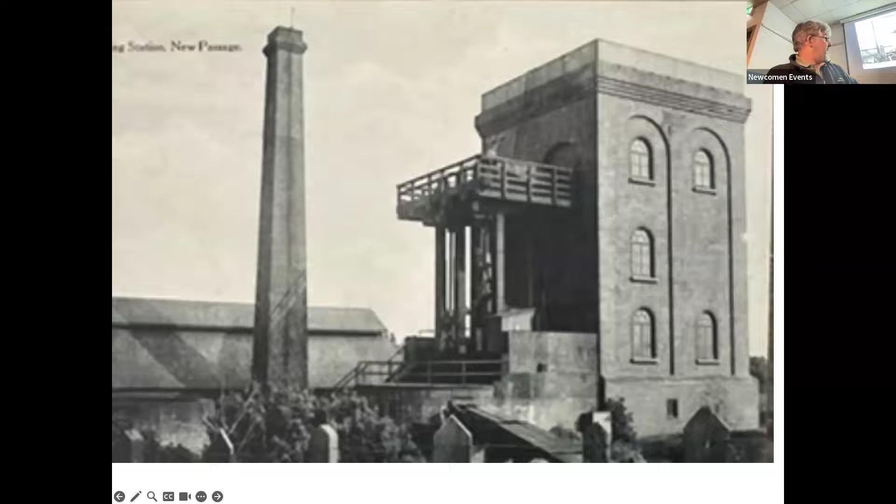I've also got two close-up shots of the pumping station itself - that one's a bit fuzzy on the screen, but it's actually quite nice. And I've got two very similar ones from that side. It's a shame there aren't any from the other side.

So what happened to the pumping station? If you go there now, there's a fenced off area and a little capped area, because of course there was a shaft. The shaft still goes down, and you can hear the trains going by underneath - it's still a ventilation shaft for the railway tunnel, as far as I know.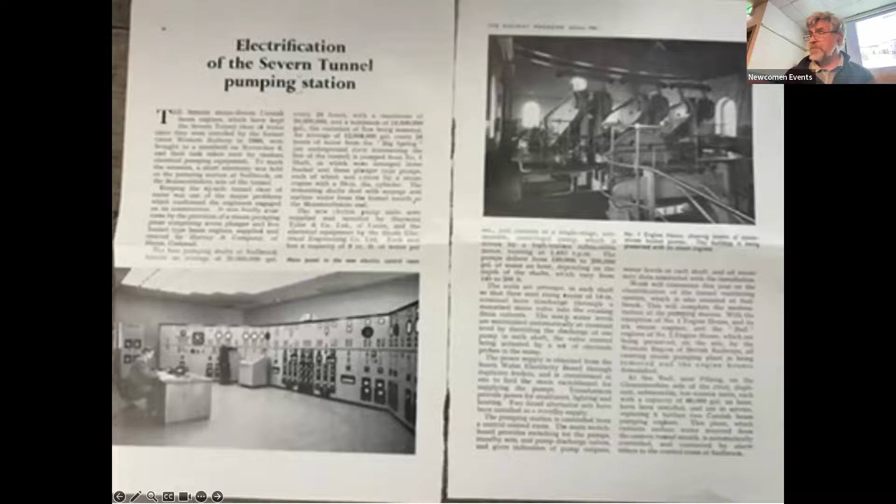That's a nice little article - oh, I've got it here. If you want to have a look at it, you can. This was in the Railway Magazine of January 1962, so that's one of the things I came across in this research. No mentions of the other side at all, by the way, but it was at the same time that they got rid of both sets of pumps.

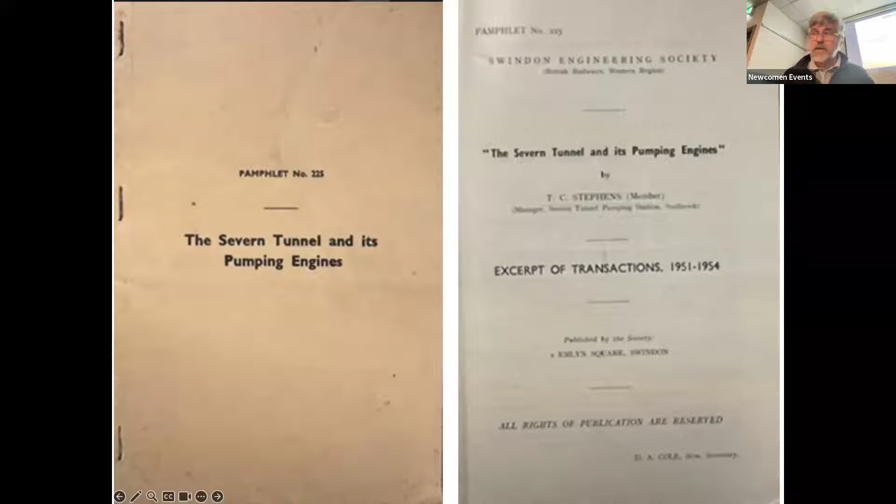This pamphlet I saw on eBay and thought, since I've got the photographs, I ought to buy this to go with them. It's a pamphlet about the Severn Tunnel and its pumping engines - extracts of the transactions of 1951 of the Swindon Engineering Society. Obviously somebody had been getting information, because Swindon and the railway is all quite interesting.

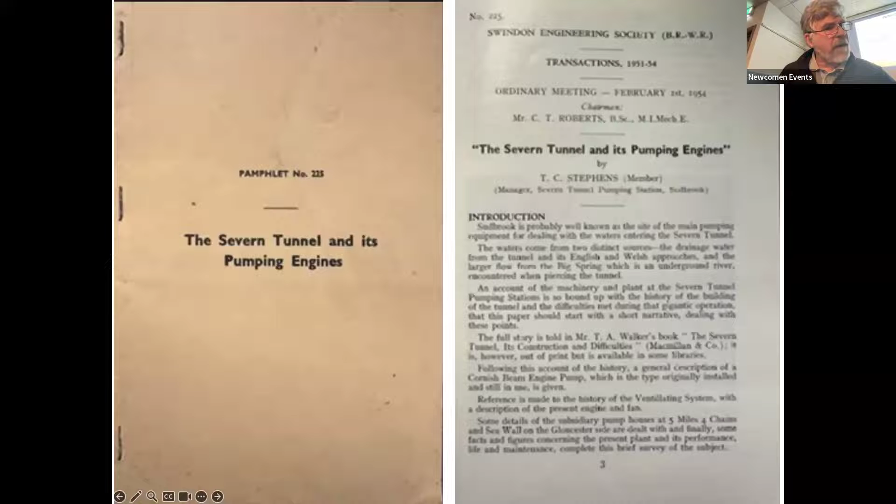If you actually read it through, the introduction tells you what's in there - a description of all the details of how it worked. We start off with the history, telling you about Mr. Lambert and the engineer Mr. Walker, and how it was all done. Then it comes down to talk about the pumps themselves.

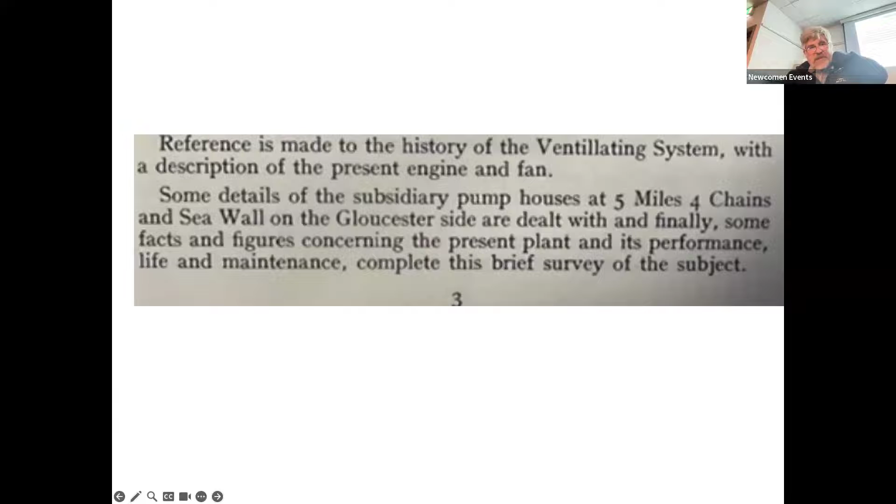It says references made to the history of the ventilating system, with a description of the present engines and the fan, because of course there was an engine to drive the fan. Then some details of the subsidiary pump house at 5 miles, 4 chains and seawall on the Gloucester side are dealt with, and then finally some facts and figures.

I challenge anybody to go through that document and find anything to do with seawalls. It jumps straight from ventilation to the facts and figures. They seem to have completely forgotten to put in anything about seawalls, on the seawall side, the New Passage side. So unfortunately there's nothing in that one either.

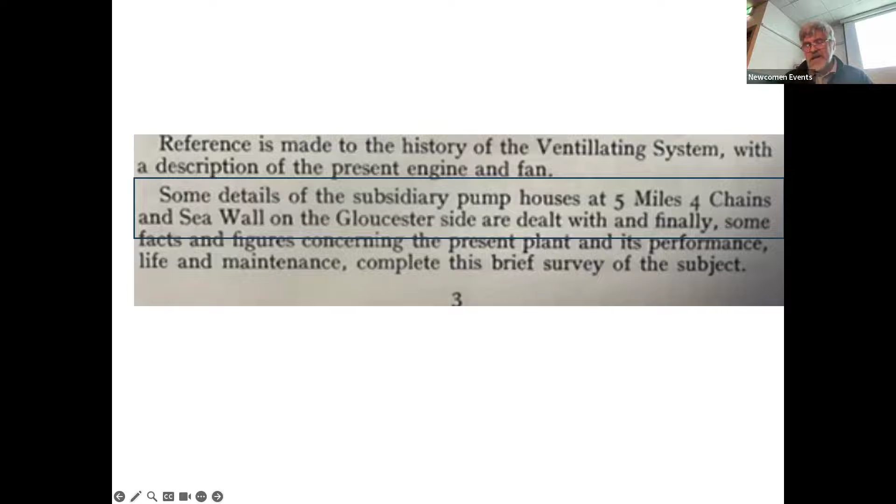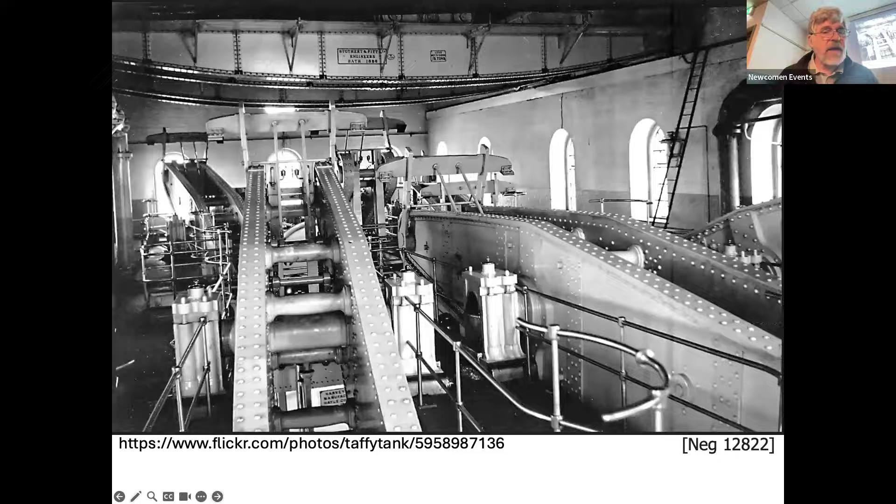So we've got, like I say, loads of pictures here, some extra ones. Not loads, but there's quite a few pictures of this wonderful pumping station on the Welsh side. Again, lots of details there as well.

I will read this one out, because if you go there now, I probably should have put in a picture of what it looks like now, which is just an empty building. It says there were some terrible industrial heritage decisions made in the name of progress in the early 1960s.

Now, people have to be aware that the 1960s was also the time when anything to do with steam was not what British Rail wanted to talk about. And these were driven by steam, so it was a case of, no, they must go, they're steam, we don't do steam anymore. So British Rail weren't interested in them.

One was to scrap the beam engines that had pumped out the Severn Tunnel since 1886, to be replaced by electric pumps. 1886 - there you go, there's the date. I knew it was somewhere in the mid-1880s.

What would it have taken to build a new building for the electric pumps and keep these magnificent engines? One of the beams was rescued and could be found in the garden of Swansea Museum, but in no context.

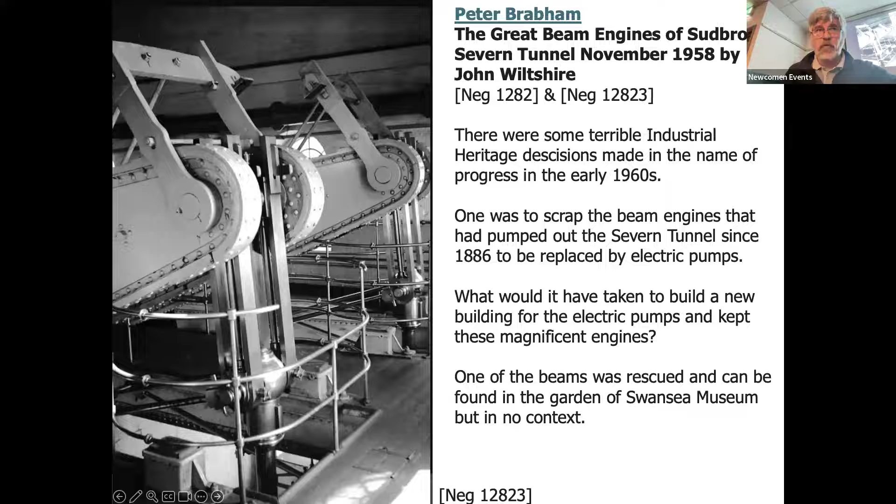I know Paul Stevens, chairman of the International Stationary Steam Engine Society, says had it happened 5 years later, maybe 10 years later, they would have probably survived. Had they been on this side of the river - I know the one I'm talking about is on this side of the river - perhaps people like Angus Buchanan and George Watkins and other people would have said, oh, let's save them. I know some people did try to say they really ought to be saved, but it wasn't what British Rail wanted. However, one was saved.

That's what's left. Now, if I finish off my bit of the talk by linking back to our first talk - that is preserved, and it's good that it's preserved, but it's preserved out of context in a museum scenario.

Now that's the same argument with Brunel's Bridge. It's great that it would have been preserved had it gone to the SS Great Britain Trust. There's the argument that says they've got the money to restore it, they've got the money to repair it. Nobody spoke up to say, actually, it would be better if this stayed in situ.

But of course these would only stay in situ if you had access to them and people could see them. And the problem with these is even now people can't go in and see, because British Rail still use it. It's an active working place. Network Rail - you'd have to get permission from them and everything else. I've never been in Sudbrook. I know one or two people who have, but apparently it's very difficult.

It would be wonderful to do a joint BIAS and Newcomen trip to go there, but it would be very difficult to arrange that. But you can go and see this one - anybody can go and see this one. But how is it displayed? Is it displayed as well as it could be?

So the same arguments that happened, or that have been going on recently regarding Brunel's Bridge - is it best it stays where it is? Is it better that it moves? Combined with the fact that, well, if it stayed, the ultimate is to stay where it is, but only if it can be repaired where it is and the public have access to it. That needs money - this would have needed money. It's costing nothing there, but apart from the occasional coat of paint. So this is where we are with heritage these days - very much so that it's a question of wouldn't it be nice if, but are there enough people putting up a voice to say no, it would be better if we did this?

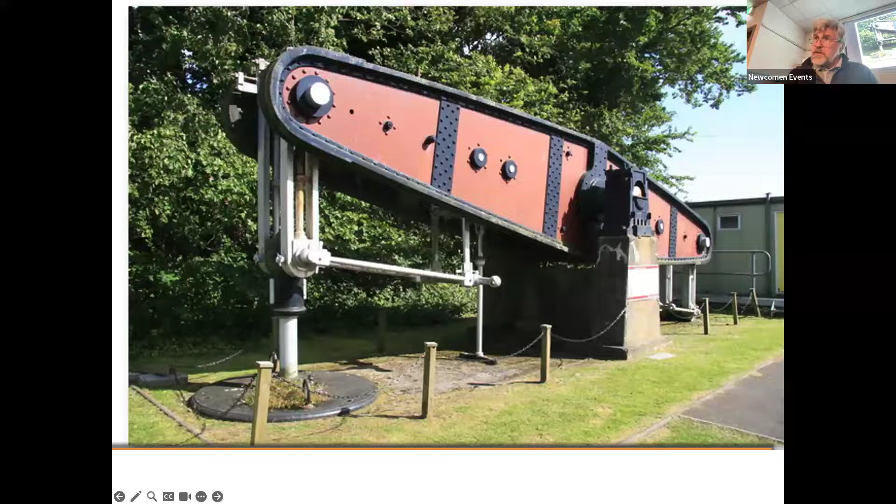Are there enough people claiming we can get some money towards this? And if you put enough people together, are there people who will actually listen and come up with the funds as well? So that very briefly links the two together, and that ultimately ends what I was going to say. That gives us another 5 minutes till 9 o'clock, so that gives us a chance for a few questions.

So Geoff, if you want to come back as well. There's a question over there.

It's more of a comment that there are bits of the Bull engine, from the Bull engine, to the National Museum Wales. Oh, right, okay. I don't know, but certainly a cylinder.

Okay, I wasn't... nope, I'm trying to end - I was just about to end the meeting, but I don't want to do that. What can we see? Oh, we're back online.

Yes, the comment there, for those who didn't hear, is that parts of the Bull engine are in Swansea Museum - National Museum, in this, okay. Again, there's plenty of engines and things in store which no one can see, sitting around in the ground.

Okay, all right. I wasn't aware of that, but it's not exactly my area of expertise. It was a nice short talk for the other half of the night, but I'm getting more interested in it, and I've got some postcards as well.

Any other questions in the room for me or Geoff? Fine. Anybody online got a question? I've got a note here that says there's a couple of questions on the chat.

Oh, sorry, I should have muted one of the... I thought I did mute that. Bit later, answer that one. No, yeah, sorry, I'm not sure why there's a bit of feedback. That one is on mute. I hope the feedback wasn't too bad.